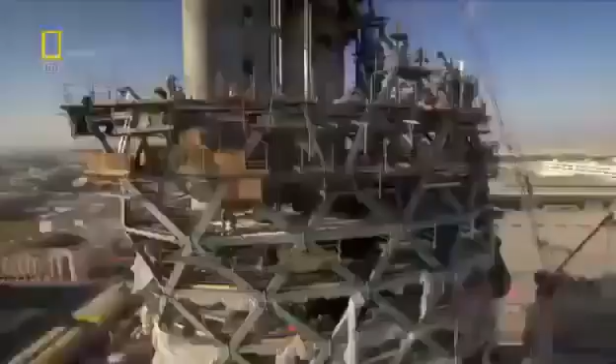To make it stand up, it'll take some extraordinary engineering that could rewrite the skyscraper rulebook.

Situated on the edge of the Persian Gulf lies the Sheikhdom of Abu Dhabi. It's the largest and richest of 7 states that unified in 1971 to form the United Arab Emirates. Abu Dhabi is undergoing one of the biggest makeovers of modern times.

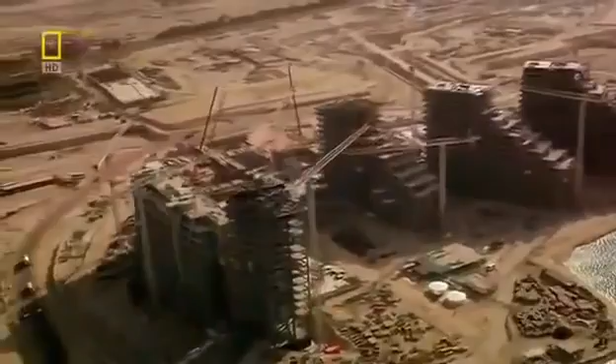Its ruler, Sheikh Khalifa bin Zayed Al Nahyan, wants to join the City Super League. And he's spending over $200 billion to transform his capital into a world-class business and tourist destination.

He's already spent a reputed $3 billion creating the most expensive hotel ever built. The Emirates Palace boasts 114 gold domes and is the height of luxury, where rooms cost up to $12,000 a night.

And that's not all. He's built one of the largest and most opulent mosques on earth. Capable of accommodating 40,000 worshippers, the Grand Mosque boasts the largest carpet on the planet and the world's biggest gem-encrusted chandelier. But even these structures have not quenched his thirst for the extraordinary.

Now, the Sheikh wants a building so spectacular it will instantly become an international symbol for Abu Dhabi. The man appointed with the task of delivering this architectural icon is the Sheikh's cousin, His Highness Sheikh Sultan bin Tahnoon Al Nahyan. Architecturally, it will be a unique building, positioning Abu Dhabi as one of the cultural hubs around the world. And architecture is part of that overall inspiration and art.

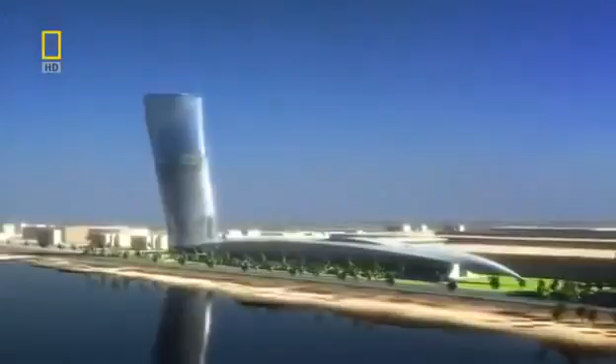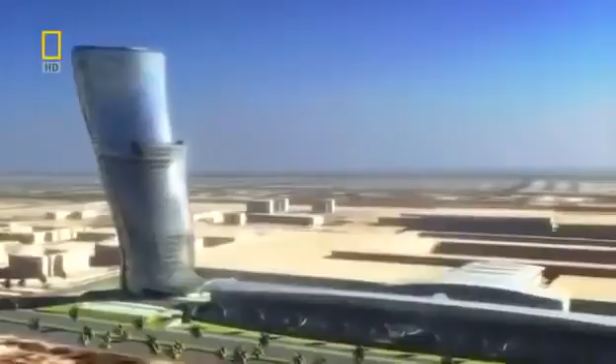The team come up with an extraordinary design. A tower that spirals out of the ground to 160 meters, inspired by a desert whirlwind and the splash of a wave rising over the sand. This gravity-defying skyscraper tilts almost 5 times more than Italy's Leaning Tower of Pisa. No single angle of this tower is the same as another. It's a structure guaranteed to amaze.

We really wanted this to happen. They could see a vision suddenly. They could see something that would stand for them. Then there was no stopping us. Sheikh Sultan wants the lower floors to become the most prestigious office address in Abu Dhabi, with the top 18 levels assigned as a 5-star hotel fit for royalty.

But for maximum impact, this landmark skyscraper also needs a prestigious location. The Sheikh decides the tower will stand next to a monument of national importance, the Grandstand. Built by his uncle and founding father of the United Arab Emirates, Sheikh Zayed, it's used to this day for national celebrations. This monument and the skyscraper will link Abu Dhabi's future with its past.

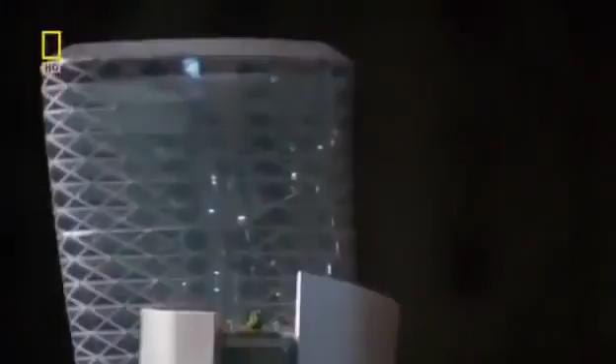Now, the idea must make the leap from the drawing board to the construction site. The only problem is, no one has ever attempted a skyscraper like this before. Everyone realized that this is a crazy structure to build, and how are we going to build it?

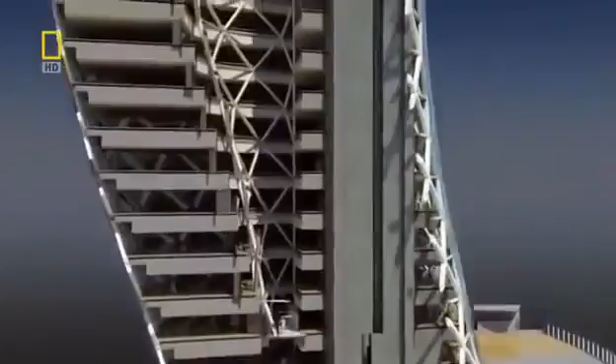To make Capital Gate's gravity-defying design a reality, it'll take some extraordinary engineering, and the challenge begins on day one. Its top floors overhang its base by 33 meters, creating huge forces that want to rip the building's foundations out of the ground.

At the construction site, project architect Tony Archibald is daunted by the task ahead. When I first joined the job, I was shown the drawings, and I kind of did a double take, and I wasn't quite sure that I got the correct understanding of the project, and it took me a few moments before I realized what we were about to undertake.

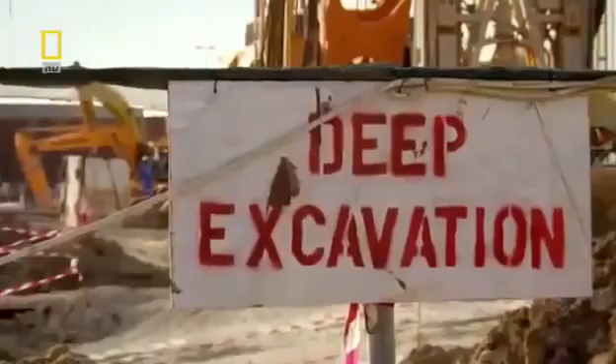Keeping Capital Gate upright is a huge engineering challenge. There isn't just one solution. To overcome the forces of gravity, it will take a whole range of pioneering techniques. But the task starts with the foundations, deep underground. On one side of the building, the weight is going down into the ground. On the other side, it's being lifted out of the ground. And that's due to the large overhang that we're having to deal with.

The solution requires almost 400 concrete piles that work in 2 different ways. On the leaning side, half of the piles push the overhang's forces into the ground. On the opposite side, the remaining piles anchor deeper into the bedrock. They resist the stretching forces, trying to wrench the building out of the ground.

Finally, to evenly distribute Capital Gate's forces into the piles, a deep concrete slab reinforced with steel is laid on top. What the foundations taught us is that every single aspect of this building has to be custom engineered.

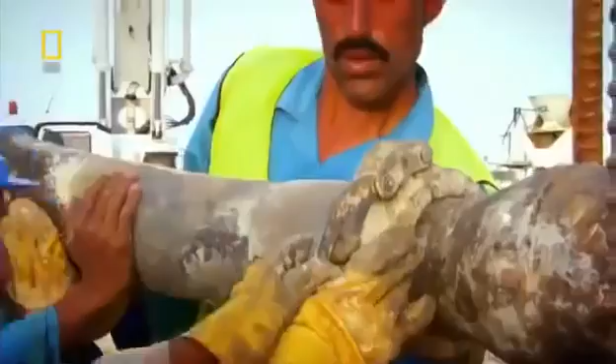Excavators dig out a colossal 6,000 cubic meters of sand. And over 8 weeks, hundreds of piles are driven into the ground. We had an awful lot of piles to put in a very close proximity. It was a real difficult challenge. There can be no let-up on this schedule. Sheikh Sultan wants Capital Gate complete by an impossibly tight deadline.

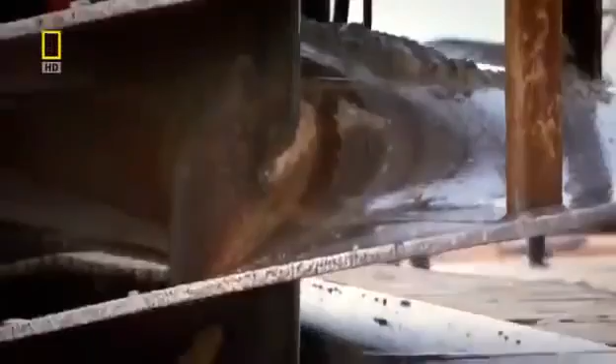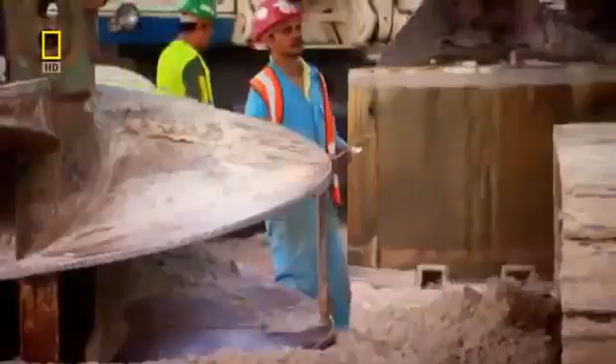With the foundations finished, building above ground can begin. But because of the dramatic lean, it will have to be constructed in a very different way to a conventional skyscraper. We realized once we'd done the foundations that this was going to be the first of many difficult problems. A normal skyscraper requires a solid core to hold it upright. But Capital Gate's curves will just crack and topple a standard core. Engineers must discard conventional thinking and devise a way to defy gravity.

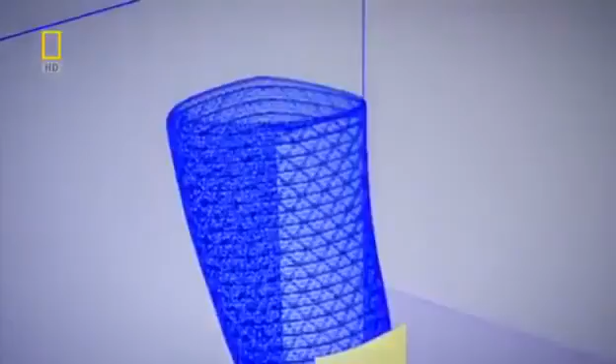Inspired by the nearby desert landscape and its wind-shaped dunes, architects have designed a curved leaning tower. But it'll take some audacious engineering to stop Capital Gate from falling over. Normal skyscrapers are built around a slim vertical core, which helps to channel the building's weight into the ground. There's so much overhang on this building, meant that a conventional core, there was no way it was going to work. You just can't build a straight core. It's just not strong enough.

Capital Gate's design would cause a conventional core to bend dangerously. The pull of the massive overhang wants to stretch the core on one side, causing the concrete to tear apart.

Structural engineer Mona Vassi knows it's a serious problem that must be solved. When I saw this one, I thought it's impossible, it's not going to work. It's just some sketch, somebody left it somewhere. But I always think that for the architects, it's easier for them to just draw something, but it's not easy for us to fulfill or satisfy their needs.

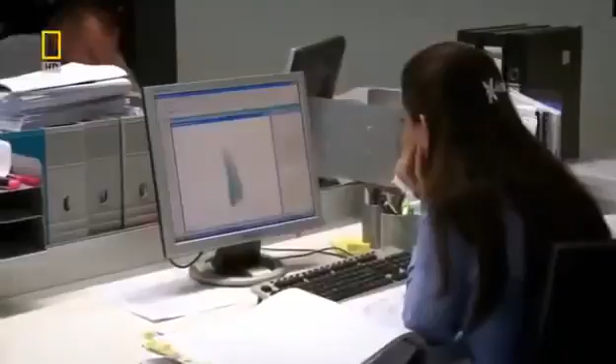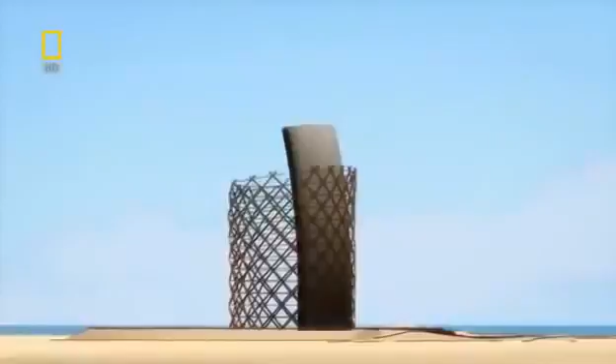The engineers developed two groundbreaking solutions. The first part of their plan is to build the core with a curve, bending in the opposite direction to the building's lean. As the structure grows, its weight pulls the core straight. In total, it shifts 350 millimeters, and the effect is significant. The concrete that would have been stretched by the overhang's pull will now be compressed and strengthened.

You build it bent, and then as you add the slabs to the upper levels, it pulls it back into vertical. So basically that whole vertical core is in compression, and that gives it immense strength.

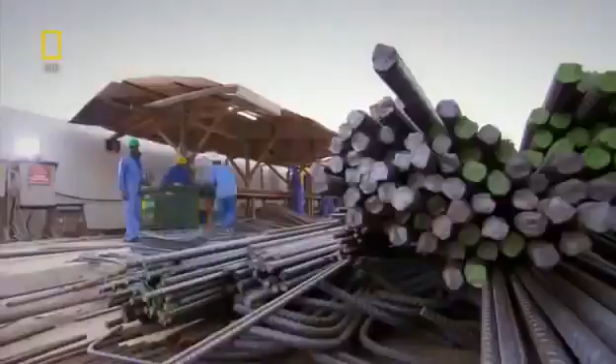The core grows 4 meters a week, and construction manager Les Fairchild is in charge of building it. This is probably the most complex core that I've come across. It's built at an angle, and effectively the core holds the whole building up. The core is built using a technique called jump forming.

First, a dense mesh of steel reinforcement is assembled. A mold then closes around the steel to form the shape of the core. The steel mesh is then filled with concrete. Then the mold or form can climb up the core wall for the process to start all over again.

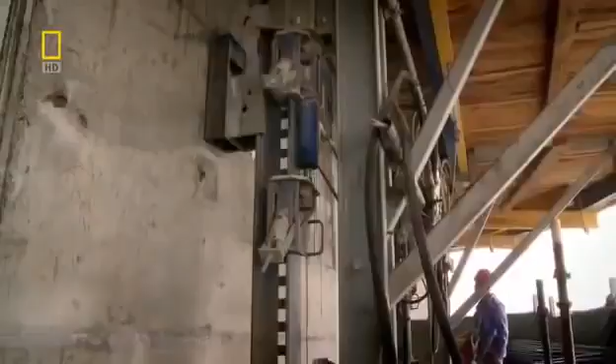Jump form is a hydraulic platform. Once we've cast each 4-metre level, we simply attach it to some runners and we jump it hydraulically up to the next level. The core will be strengthened as it straightens. But for the core to carry extreme loads, the concrete must be reinforced using steel rods called rebar.

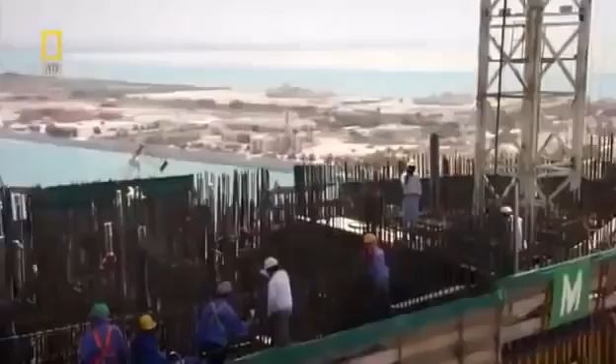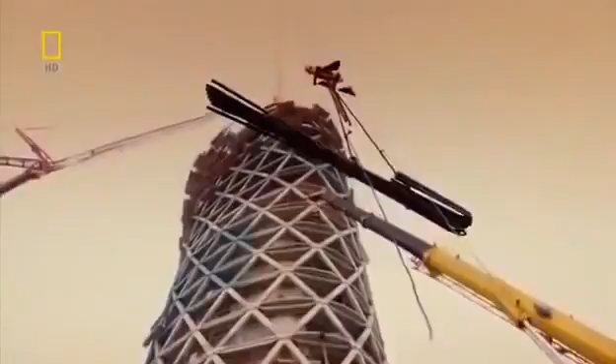The rebar is installed during the daytime, but temperatures of up to 50 degrees Celsius and concrete don't mix. It dries too fast and could crack. To set at the right speed, the concrete has to be poured during the cool of the night. As the core grows higher, the liquid concrete has to be pumped over longer and longer distances. So the consistency of every batch is first checked in a slump test to ensure it won't block the pipes.

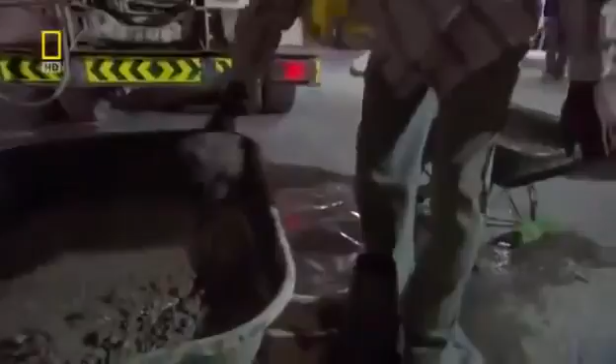When you first see it coming out the wagon, you can usually tell whether it's a tight mix or whether it's a loose mix, and that's what we're testing for really in the slump test. We simply make a cone, lift the cone off, and depending on how much it reduces in height, tells you exactly what the slump is. The one we just witnessed is 215 millimetres, which is within the specification, so that's good to go.

Whilst the truck drives to the pump, Fairchild needs to get onto the core. He can take the stairs, but 90 meters up is a long climb. He knows a much faster way. Crane lift.

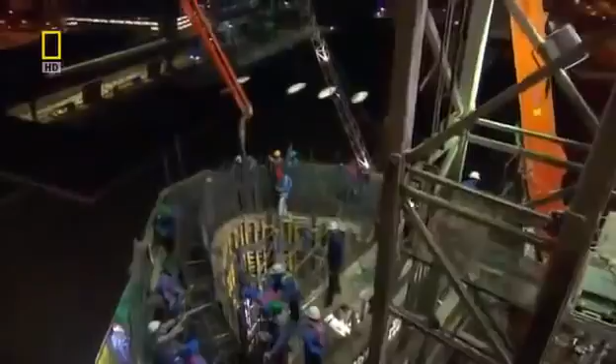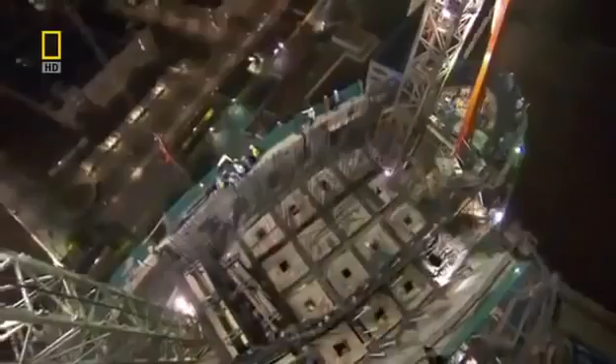It's going fairly well. We've had a nice continuous supply of concrete, and we're now pumping it up to the upper levels of the building. And the lads are just steadily working away. They actually work from one side to the other in metre deep layers, so they're doing everything right. It's always exciting when we pour concrete. It means it's another achievement really. We're going up another level.

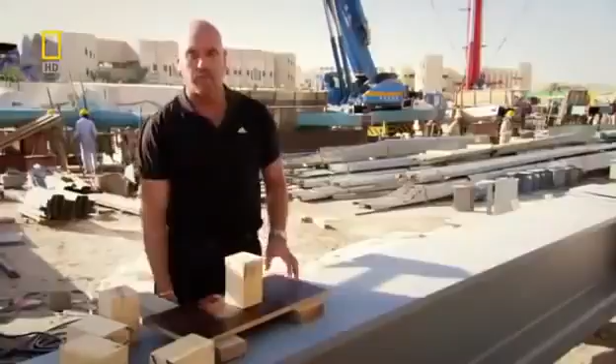But building the core out of alignment and packing it with rebar still isn't enough to stop gravity toppling Capital Gate. What we came up with is a post-tensioning solution where we introduced much more reinforcement into the core wall and then used the tensioning process. Basically that was done by introducing high tensile strands to the centre of the walls.

When we reach the designated height, we simply apply tension. We're actually stretching the tendons that fall through the wall, and we're actually pulling them tight, and that's done by a tensioning machine. So effectively when the tension is complete, when the load was applied to the core it would stay intact, and the additional reinforcement would prevent it from falling over.

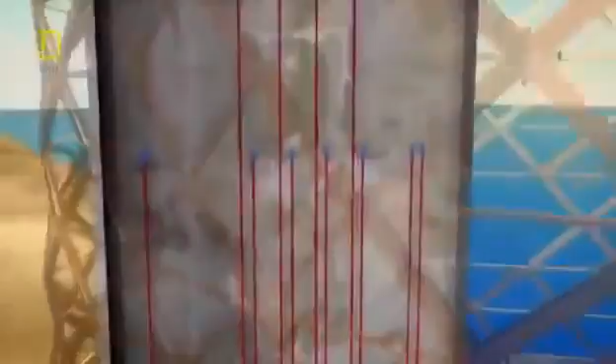To post-tension the core, 146 steel tendons are threaded vertically through the concrete. Each tendon is 20 meters long and runs through 5 floors of the building, overlapping each other for maximum strength. When the tendons are stretched, the stress counteracts the pulling force created by the massive overhang, stopping the concrete from tearing apart.

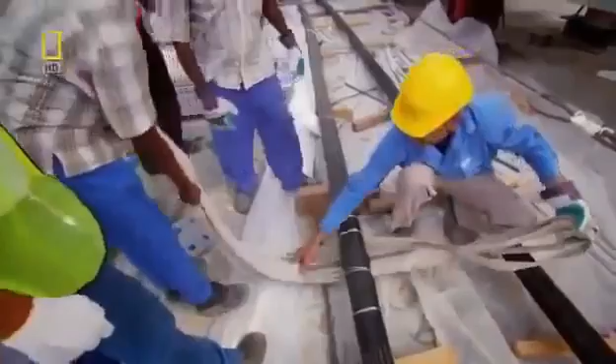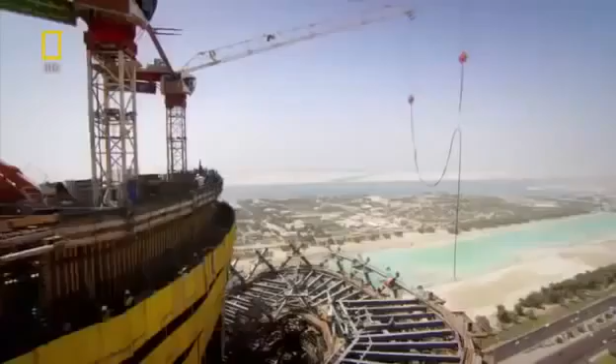On site, the team are post-tensioning the core, but no one has ever attempted this vertically in a skyscraper. The long tendon is lifted to the top of the core. The team used the steel tendon's weight to force it through a duct already cast through the core. Once the tendon is in position, the team lock off both ends, ready to tension its individual strands.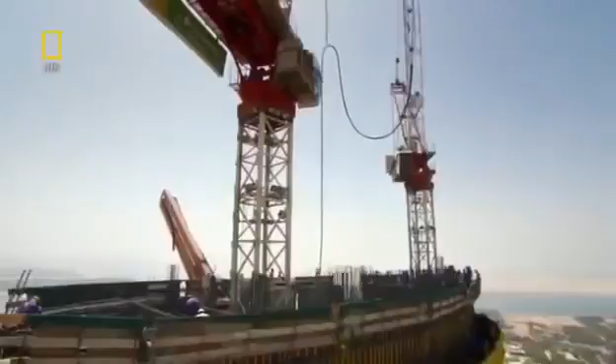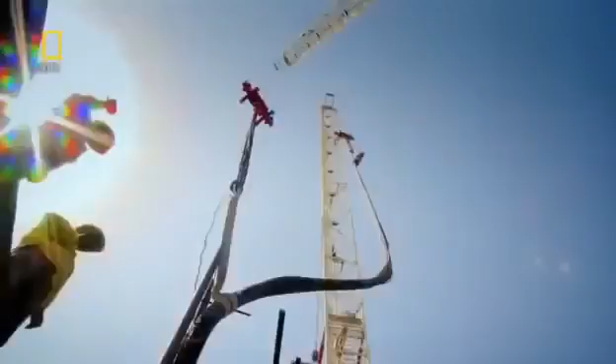A pneumatic jack clamps around one strand at a time and stretches it. It's equivalent to about 5 family cars pulling on one end of the rope. With the steel tendon now stretched to the right stress level, concrete pouring can continue upwards. The quantity of cable that's been used is approximately 120 tons and 120,000 meters in length. It's about 44 times the Golden Gate Bridge. This process is repeated over and over and means the core should withstand the huge loads generated by Capital Gate's extreme overhang.

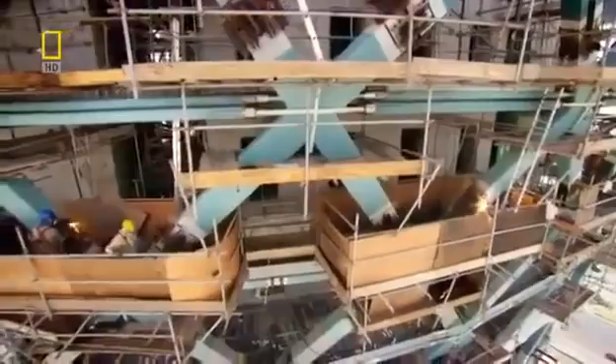But now, an even greater challenge must be tackled. The building's twisting, leaning design must somehow be turned from theory into reality. And once again, it'll mean bending the rules of architecture. To create Abu Dhabi's architectural icon, Capital Gate needs an exterior curved leaning frame. But once again, the building's extreme tilt creates a problem.

The shape of the building with this very pronounced overhang meant that traditional skyscraper building solutions just weren't going to work. There's no way. The building design requires it to be thin to maximize floor space and allow for huge panoramic windows. Irfan Ahmed is one of the engineers who has to find a solution. For structural engineers, it's always challenging to accept the architectural requirement, you know. They always want thinner and thinner and thinner.

Surprisingly, the humble chicken could help with this engineering dilemma. It is essentially a skin of structure around the outside of the building, not unlike an egg. An egg can withstand huge loads because it evenly distributes forces down through its shell, which means the shell can be thin, creating more space inside. So it's very, very thin, it's very, very strong. If I try to crush this egg, you can see that it's actually amazingly resilient. So let's see how resilient.

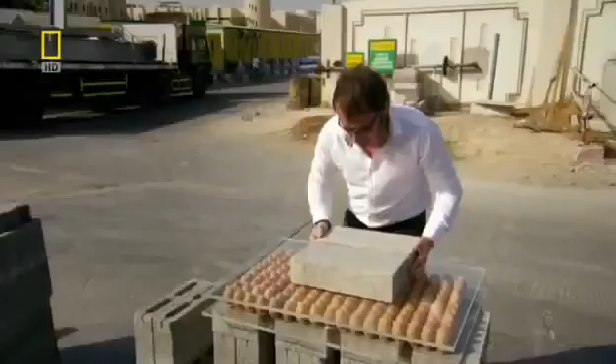Here I have 170 eggs laid out, and we're going to put load on top of these in the form of breeze blocks. Moment of truth. So far, so good. Each one of these blocks weighs 15 kilos. So we've nearly got half the weight of a car on here now, on our 170 eggs. Let's see how far we can push this.

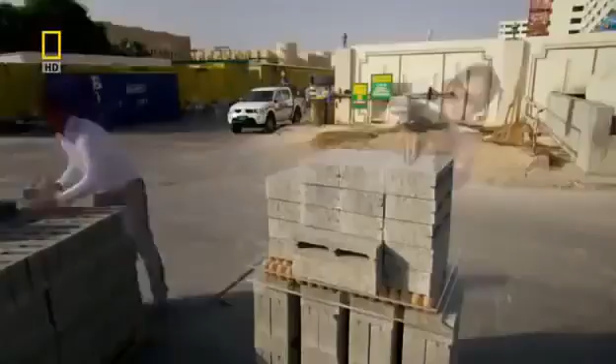That's 30 blocks, and I think it's about to go. It's going big time now. This is it. This is the end. No! These eggs eventually crack under the weight, but they withstood over 450 kilos, half the weight of a family car. Capital Gate can't channel forces with eggshell, but it can use the principle of how it works, using a diagrid.

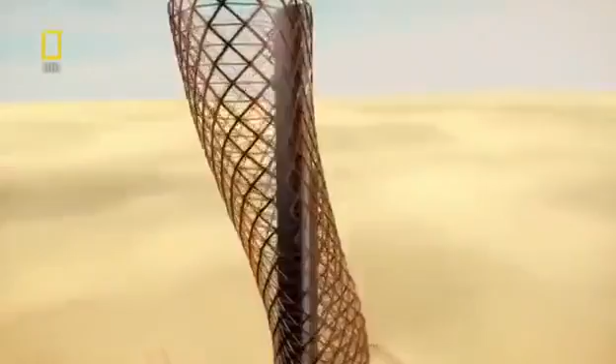A diagrid is a giant mesh of steel that wraps around the core. Steel beams connect to a node or joint to form a cruciform section. 720 uniquely shaped sections link together to form the thin but immensely strong diagrid. Working together, these cruciforms equally distribute the forces down the outside of the building. The way it does that is by making a uniform net, so that the forces are very evenly distributed, and that means that we can get away with slenderer sections.

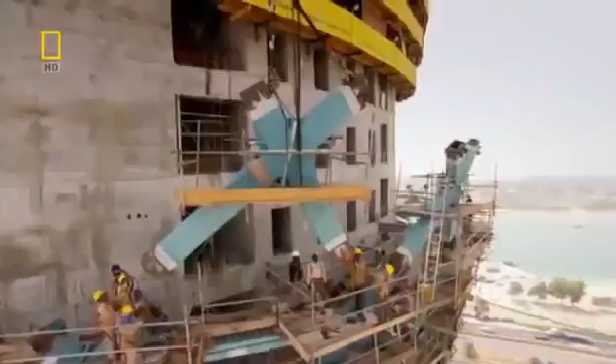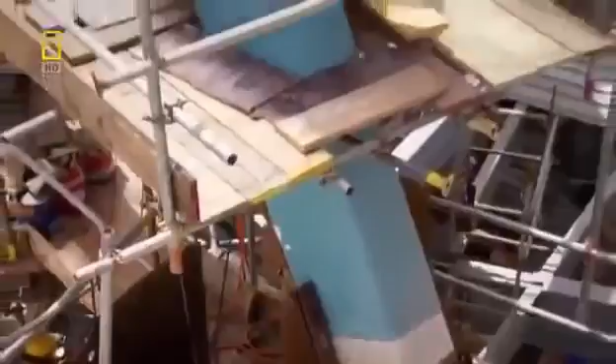On site, a team of 240 steel fabricators assemble the diagrid. They've built the easier straight part of Capital Gate's base, but now the structure is starting to lean, making installation even more challenging. Each cruciform, weighing up to 16 tons, has a unique geometry and must be crane lifted at a precise angle. If the diagrid is not assembled with millimeter accuracy, the mesh will not channel the loads and the structure could be weakened.

The engineers must communicate closely with the expert steel fabricators. They design and manufacture the diagrid 150 kilometers away in the neighboring emirate, Sharjah. Here, cutting-edge construction is the norm. They've built one of Malaysia's Petronas Towers and Dubai's iconic skyscrapers, the Burj Al Arab and the Burj Khalifa. But Capital Gate's revolutionary design pushes even these experts to the limit.

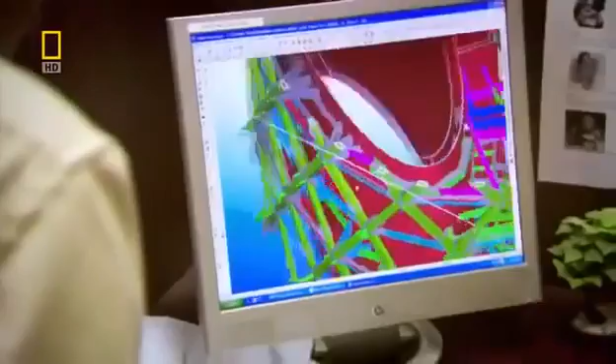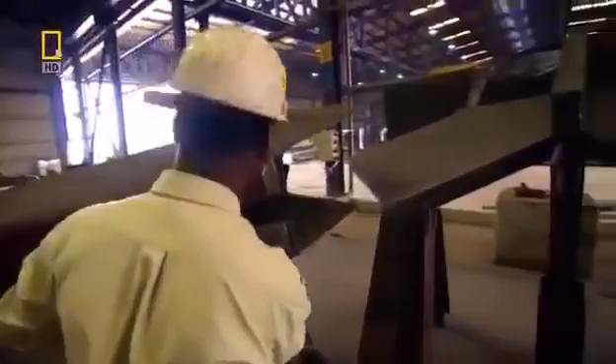On the planning floor, project engineer P. Bhaskaran and his team need bespoke 3D software to tackle the building's highly complex diagrid. The 3D modeling is done, and any unforeseen criticalities will be very clearly identified in the 3D model. Each one of the 720 cruciforms is precision engineered, not only to channel huge forces, but to connect with millimeter accuracy to the neighboring cruciforms and the glass facade. But to measure their exact angles, the team used some old-school technology: chalk. It might look unsophisticated, but it's highly accurate, ensuring all the elements will join together.

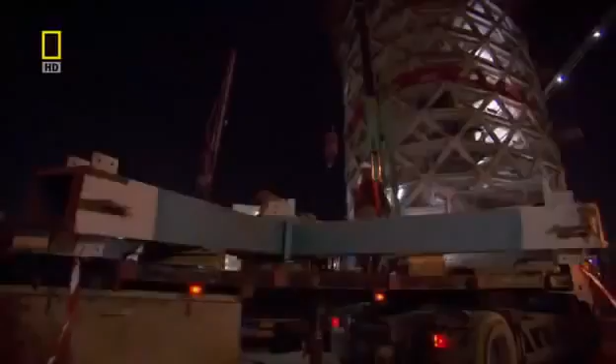To keep up with construction, the factory must produce 18 cruciforms every week. Constructing such a huge building, a critical building within the short span, without working 24 hours, it is absolutely not going to happen. As the skyscraper reaches new heights, the long hours start to pay off. This design pushes the diagrid technology to its absolute limit, and in fact far beyond what's ever been achieved so far. Even in your dreams, you're thinking about this project. So once you see the structure coming up, you forget all the long hours you spend and all the sleepless nights.

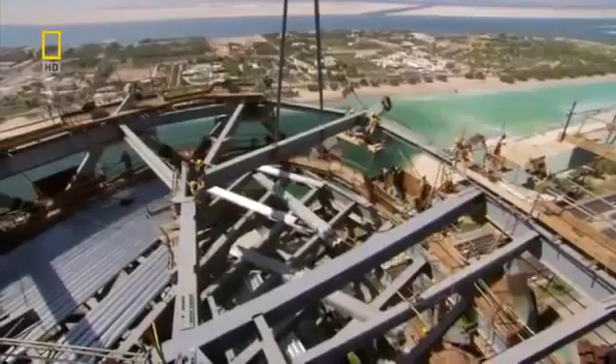A colossus is fast emerging from the Abu Dhabi sands. Now, this leaning tower must be clad with a glass facade. And as always with this gravity-defying structure, it's going to require some revolutionary engineering.

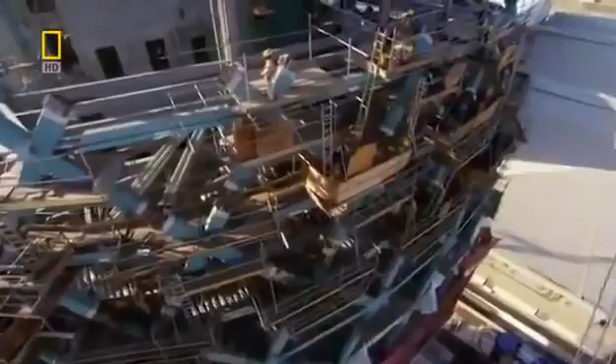Glazing Capital Gate's leaning curved frame is a major problem. Covering its unusual contours with curved glass will blow the budget. So the skyscraper's curves must somehow be clad using cost-effective flat glass panes. Fortunately, ancient Greek geometry can help.

Because you've got a complex shape, it's an organic shape, it's a curved shape, the only way to model that with straight lines is to use triangles. Triangular panes can pivot in 3 directions, and when joined together can cover complex geometric surfaces. But because every angle of the building is unique, it'll take 26,000 triangular panes to form the facade.

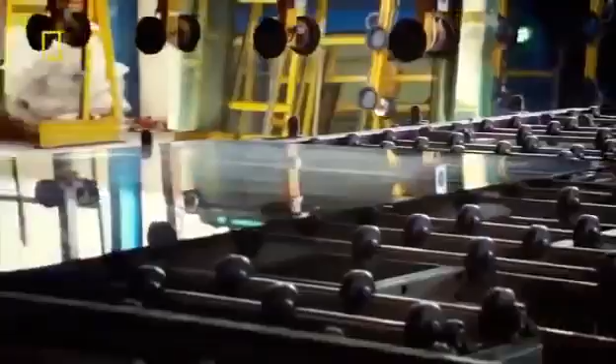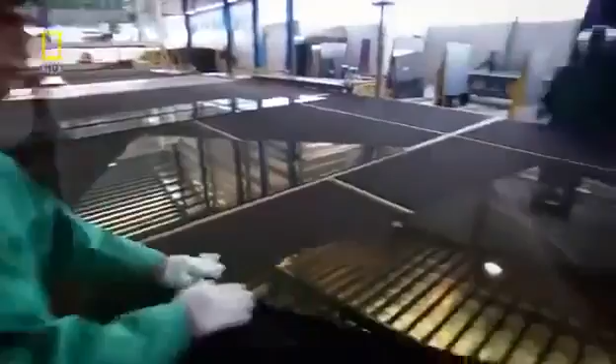With so many glass triangles to cut, the local glass factory springs into action. Each pane is scored by an automated diamond cutter to an exact pattern. The triangles are then sent along the production line. The team is under constant pressure to deliver enough glass to the site.

Hey, this side, you guys, hold it.

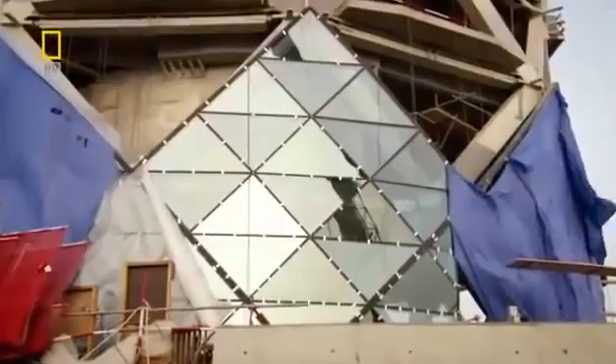After several weeks, 8 diamonds are in place and another 100 standing by. But the glass design is so unconventional, it still has to pass a number of tests to prove it's up to the job. Because we'd already started the glass installation, the results of this test were absolutely key. Each panel is stacked one upon the other. So if we'd had any kind of problem, we would have had to unstack them, which would have had disastrous consequences for the program.

This is no ordinary glass skin after all. Capital Gate's core straightens as it grows. The skyscraper will not stop moving until after completion. Normal glass facades can accommodate minute movements caused by wind and temperature changes. But to stop the glass shattering and keep the building watertight, the panels must be designed to shift by up to 20 millimeters. The scale of that kind of movement is almost unheard of in glazing systems. It's a vast amount of movement.

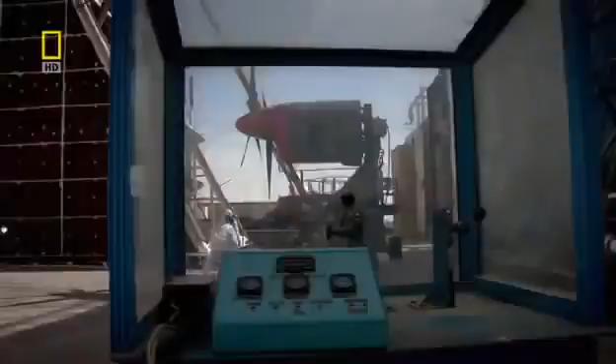With glass installation ongoing, construction manager Craig Rooney needs to know the panels will perform. We don't want to get to the top, we've done it, we've installed it, we think we've done a great job, and then it all leaks. The panels must be tested to the limit at a Dubai laboratory. A plane engine and many liters of water simulate worst-case scenario weather.

Now the moment of truth. Any leaks could be a disaster. And it's bad news. The first time we got a full water test, we had a leak. The fact that we had a leak was devastating to the whole team and very alarming.

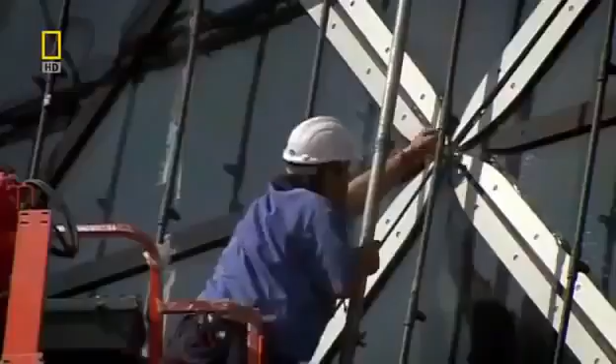The diamonds connect to each other by a bespoke two-layer seal. The flexible spongy seal allows the diamonds to move and keeps water out. But if any water does seep through the outer seal, drainage tubes fitted at intervals let the water flow away. The panel has failed the test. Water has flooded inside and penetrated the inner seal.

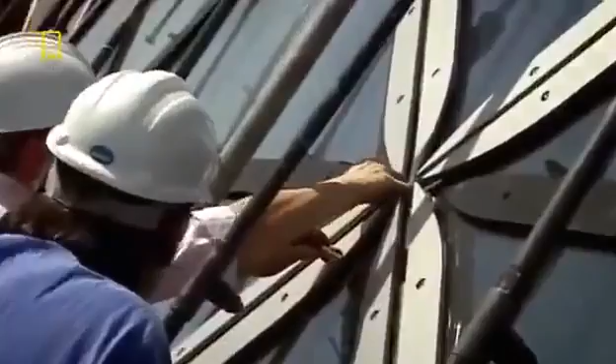If it was a fundamental failure, we're back to the drawing board, so the cost and the budget and the program all go completely out the window. The panel is examined. Answers are needed fast. Fortunately, it's not a design failure. They discover a drainage tube is only blocked with sand. The problem resolved, installation can step up a gear.

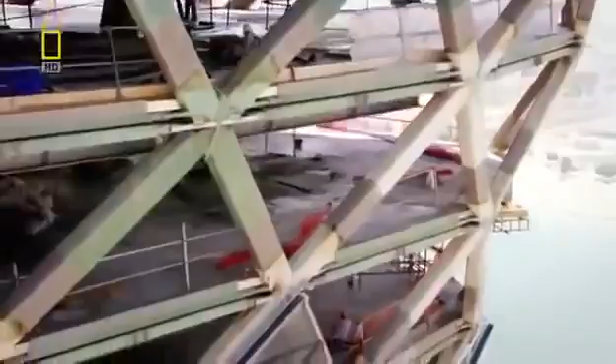But as always with this audacious building, one problem is solved and another is just around the corner. To give Capital Gate's five-star hotel lobby the wow factor, architects again plan to push the design to the extreme. Now they want to build an infinity pool and a restaurant, hanging 100 meters above the ground.

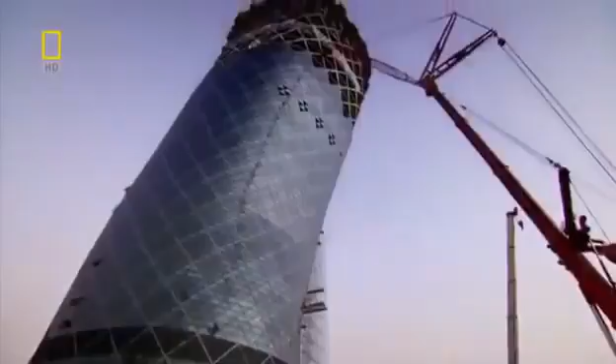18 months into the build, Capital Gate's design is about to give a new slant on high-rise living. The architects want a pool deck and restaurant suspended in the sky, but it's an engineering headache. There's so many requirements that architects have that really put us in so much trouble as engineers, but you want to make sure you have a safe structure.

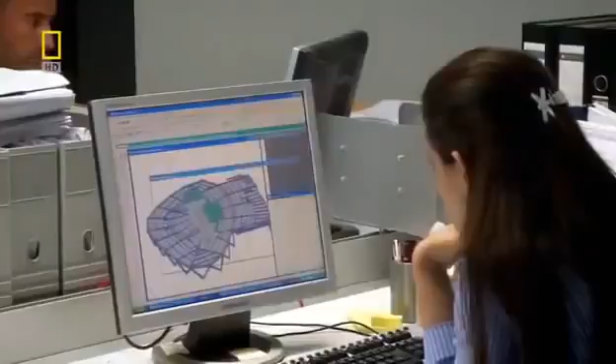The design calls for a two-story extension, hanging without any visible support. But the pool's water alone will weigh 150 tons. The structure's huge mass means it needs reinforcement. We needed some supports from below, otherwise there was no other solution. I don't think you can have a cantilever that huge on this building, no way.

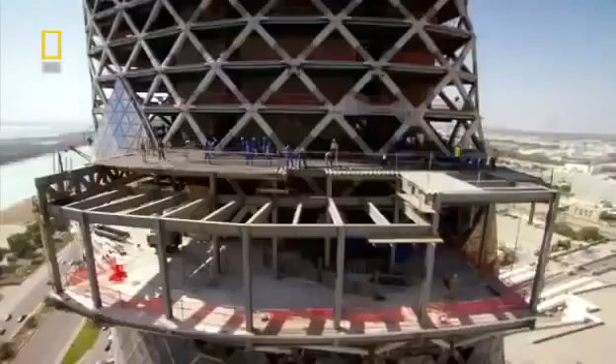The design will only work if it's underpinned with 22 steel struts. They will carry the loads back into the building. But the struts must also look delicate to meet the architect's aesthetic demands. On the construction site, 90 meters up, the pool and restaurant is taking shape. All of its structural elements are in position, except one. The team are raising its last 6-ton floor beam.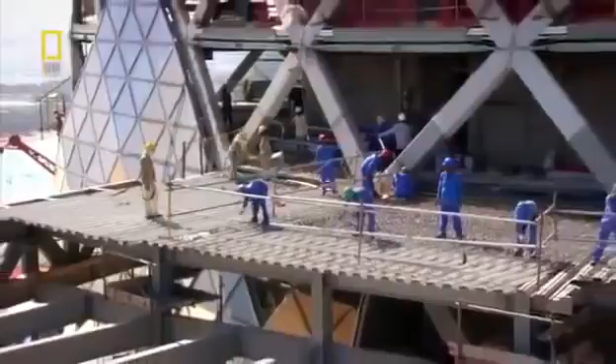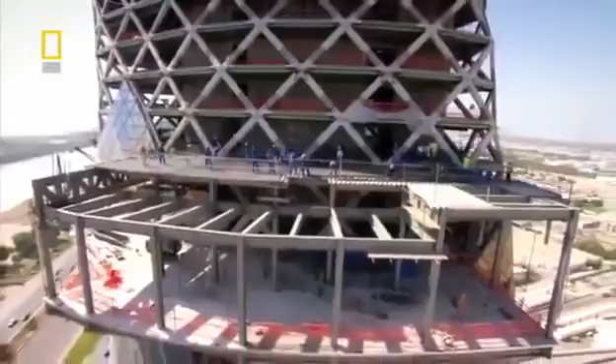It's taken many crane lifts, but one of the highest suspended swimming pools in the world has made the leap from blueprint to building. See all those lines that you just drew? They're actually drawing the same thing for you, but with a crane. But the feeling is indescribable.

And the structure's muscular struts and connections are also elegant. The idea behind these junctions is that they behave like the insects that can walk on water. They're sufficiently light that the surface tension keeps them above the water. So these little brackets dissipate the forces from all that weight.

Capital Gate is fast becoming an Abu Dhabi landmark. But the taller it gets, the more the weight of its upper floors is a problem. The skyscraper needs to go on a diet. And this time, the architects come up with a clever solution. The building has lots of visual surprises.

And one of the most important ones of those is the internal atrium. It's a kind of a light well that brings light from the sky deep inside the building, and it extends over half the height of the building. So it starts out very, very small at the bottom and opens out in a big funnel. This cavernous hole is good news for reducing weight and minimizes forces.

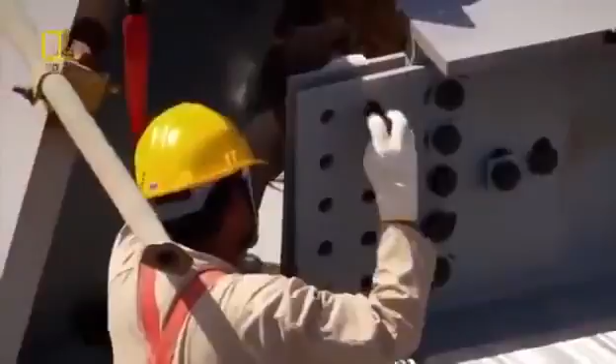But the atrium is a double-edged sword. The floors are critical in transferring loads from the diagrid to the core. A giant hole through 18 floors means these loads must find another pathway. It's a very, very big hole in every single floor plate. So our engineers really had their work cut out.

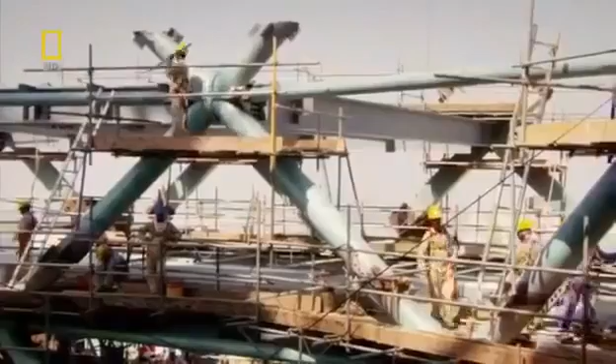You don't want to have an opening in your floor. You want to have more concrete, reinforced concrete, to transfer these forces. The forces need to flow away. And the solution is pioneering. An internal web of steel mirroring the external diagrid. This is the first time we've ever heard of this being done.

The internal diagrid is actually a fundamental part of the structure. This funnel-shaped internal skeleton carries the forces of an 18-story building down to its tapered base and into the core. But the loads are extremely high for such a small area. To stop the atrium punching through the core wall, the concrete needs protection.

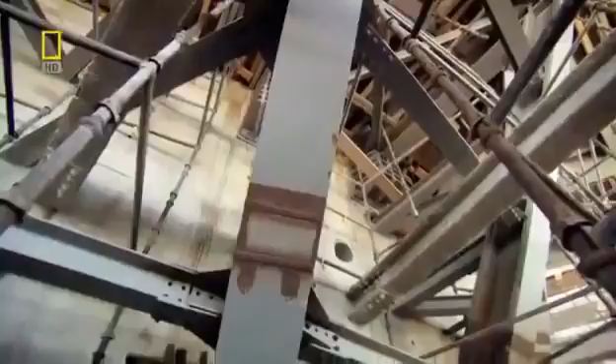The answer? 6 giant plates of steel that brace the connection to the core wall. The connections are really a wonderful, wonderful piece of engineering. They're 8 meters high. They span 2 floors, and they connect back into the core. The atrium's near completion brings Abu Dhabi one step closer to achieving an iconic landmark.

But as the sun goes down, this isn't the only celebration underway. On site, the Indian steel team are holding an annual blessing to the Hindu god Lord Vishwakarma, the protector of architects and engineers. Their livelihoods depend on staying safe, and although they use safety equipment and are highly skilled, working with huge sections of steel at height is never risk-free.

We pay our respect to God and get the blessings from the God. We do that for the safety of all our workers and for the proper completion of the job. Every trade of workers we take, the basic tools they are using on site, that has to be just kept in front of God, and the workers, they feel themselves that they are in safe hands. The tools are now blessed, and the steel team's morale is high.

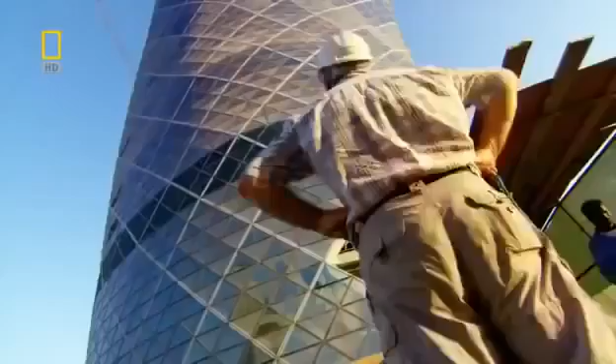But the glass installers, lifting diamonds to over a height of 100 meters, are getting the wrong kind of lift from Abu Dhabi's highly unpredictable wind. If the wind is too strong, then you can feel this in your hands when you hold these diamonds by rope. I always get nervous if I see the panel starting turning. And this makes me always a little bit afraid when I see diamonds going up and starting moving.

Meyer has to act quickly, or this 4-ton diamond could smash into the building. Not for the first time, lifting glass is delayed by changeable weather. At this rate, Meyer won't install the remaining 107 panels in time. But Abu Dhabi's wind isn't the only problem the Capital Gate team face. A last-minute design request comes in from the Sheikh's office that could have serious implications.

With just 6 months to go to completion, the Capital Gate team should be on the home straight. But those plans may have to be put on hold. I had a telephone call saying that we had to put a helipad on the roof, which I thought was a joke, but I was astounded that we got this at such a late point in the project.

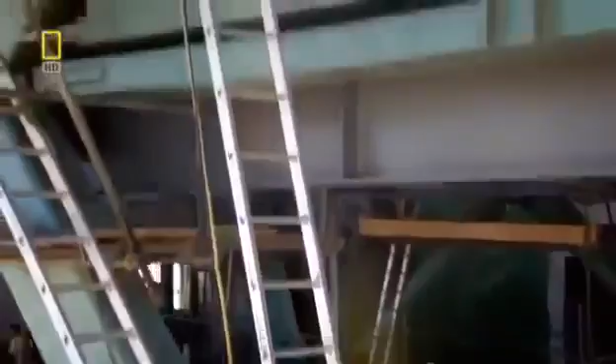Integrating what will be Abu Dhabi's highest helipad atop one of the world's most daring skyscrapers at first seems a simple request. But it actually poses 2 serious problems. It'll create new forces that must be absorbed by the already strained core, and unpredictable wind flows that can cause potentially lethal flying conditions. You get a thing called wind shear, tipping the whole helicopter onto its side, and this is a very real and very dangerous risk.

These rapid wind changes, known as wind shear, can affect the lift on helicopter blades. Aircraft can be blown off course, or literally fall out of the sky. There is no way that we could have any margin of error on the safety. The only way we could predict what the wind shear would be like on the top of the building was to model it in a wind tunnel.

In London, England, a scale model of Capital Gate is put through its paces in a high-tech wind tunnel. Just as the team fear, within seconds, wind shear conditions appear. Air currents are flowing over the top of the building, but then separate from the surface, spiraling inward to form a realm of turbulence.

Wind engineer Leighton Aurelius knows the consequences could be serious. If the pilots lose control in this random ball of energy here, they may in fact end up crashing onto the helideck, or even worse, onto the tower itself. I'm sure that can occur. But that's not all the wind tunnel test reveals.

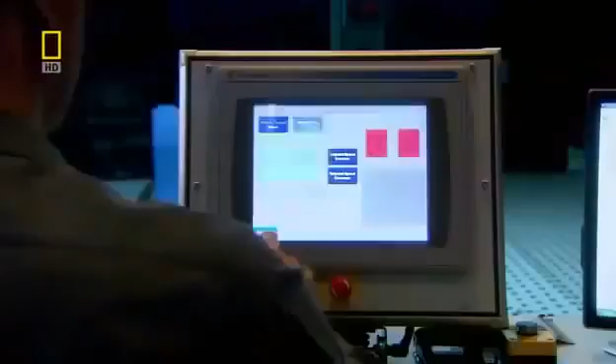Wind impacting the helipad is also creating huge suction forces. We're talking about very large forces here wanting to pull the helipad off the top of the building. Something in the realm of several large trucks or big rigs trying to pull this helipad away.

To make the helipad safe, Aurelius and his team have to go against conventional thinking. We didn't think that lowering the helipad was actually going to be the optimum design, but we see reduced loading on the helipad as well as safer conditions for the pilots to land in. Lowering the helideck to just 2 meters above the roof dramatically decreases the wind shear threat, and means Capital Gate's core will withstand the additional loads.

We're relieved, frankly. The tests have actually confirmed now that we can have it in our original design position, which is very low, which will mean that the profile on the skyline is exactly where we want it. But it'll take another 5 months to just draw up the helipad's blueprints, and a crane must be left behind to build it.

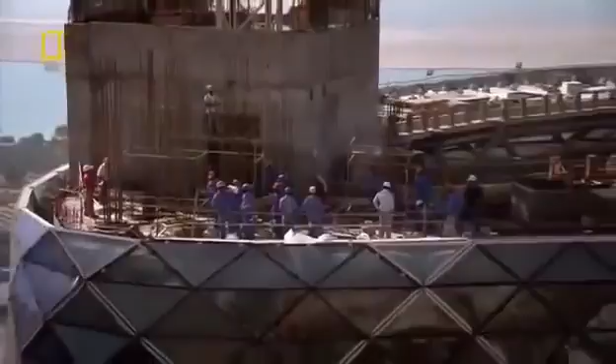Now, with only weeks to go until 0 hour, the team are installing one of the last glass panels. It's a moment that once seemed a long way off. In my office I have a plan of all the diamonds we have to install, and in the beginning it looked like I'm in jail and I'm marking the wall with marks for each day. And so in the first time I felt I never will finish this project. Just 10 months since the first diamond was fitted, the facade now shimmers in the sun.

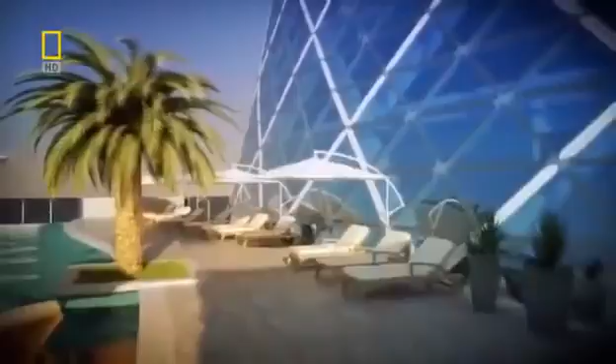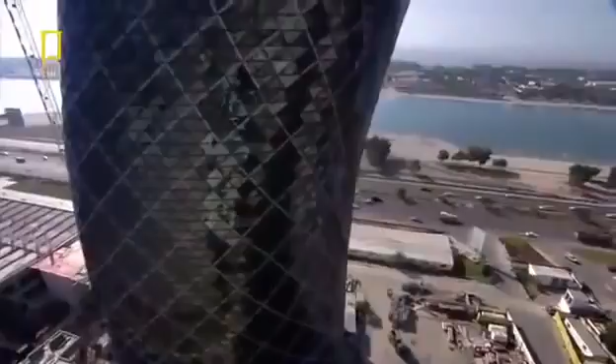Capital Gate's internal fit-out will take another year. Only then will its 5-star hotel and Abu Dhabi's most unusual office address be open for business. But against the odds, the team have created one of the most extraordinary megastructures on the planet. Capital Gate twists and spirals out of the ground, soaring to a full 162 meters. It's taken nearly 6 million man-hours to construct, and its overhang is spectacular.

You see the building and you stand underneath the overhang. It's extremely impressive. It's a fantastic feat of engineering. I feel as though I've been here an eternity, but it's probably been the quickest 2 years of my life. It's been an amazing journey and we've learned so much. And actually I think we've demonstrated that some things that looked impossible or even ridiculous were actually possible.

And Abu Dhabi's past will soon be physically linked to its future by a wave of steel that'll rise over the grandstand and splash up the skyscraper's mirrored glass. Abu Dhabi is a fascinating part of the world to be at the moment. It says to people we can step outside of the box. We don't have to follow the rules.

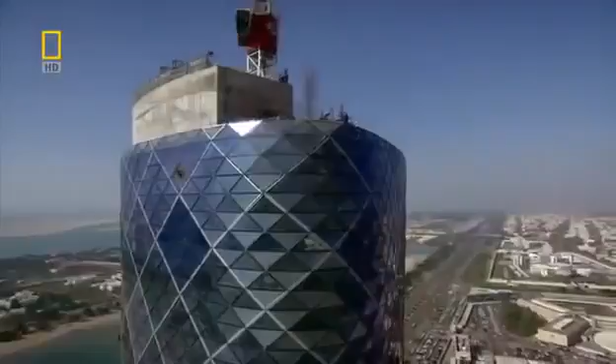With the 2010 World Future Energy Summit just weeks away, Sheikh Sultan can be sure Capital Gate will show the world what Abu Dhabi is capable of. This building is really iconic. It catches the spirit of Abu Dhabi and will be part of the postcard image of Abu Dhabi. The team have achieved what some thought was impossible. A leaning tower that claims the world record for the most inclined skyscraper on Earth.